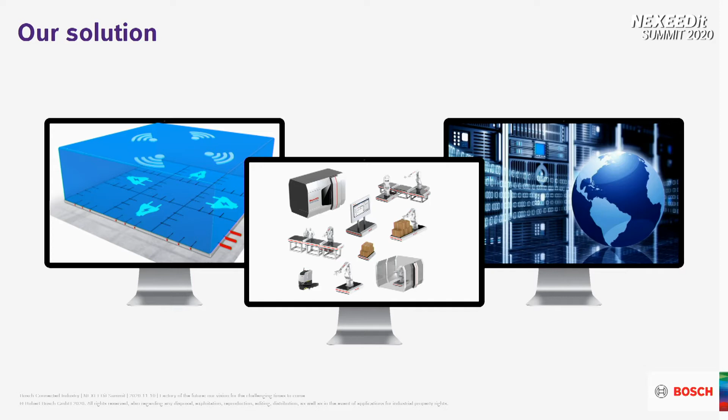What does it mean? We believe that in the future, customers will want to customize their products on their own on the internet. They will then set their order to the manufacturer. The manufacturer has to use the data from there continuously on, go into procurement, into pre-production, through the production process, through the quality supervision, but also in the dispatching, send the material away to the customers, and finally trace the product for its whole lifetime. If we are able to do that, we have a completely changed and digitalized manufacturing process, and that is what Nexeed is all about. Nexeed is about creating this manufacturing environment based upon the corresponding software solutions.

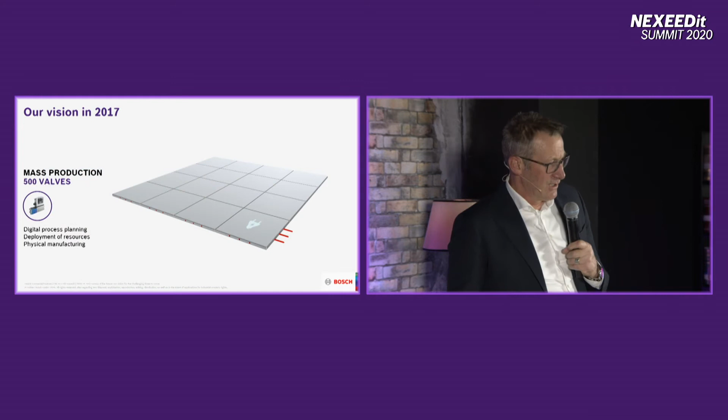How can it look like in the detail? Here we see a typical idea that we had in 2017. We would have a vision where you see the factory floor. The factory floor is charged inductively, so the operational material can move. We create an assembly line. We have open floor space.

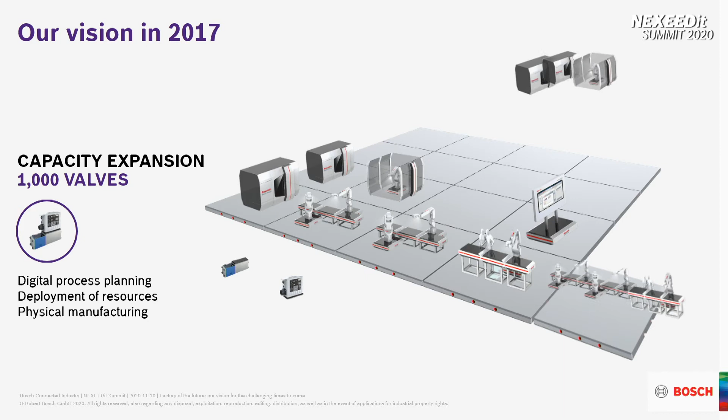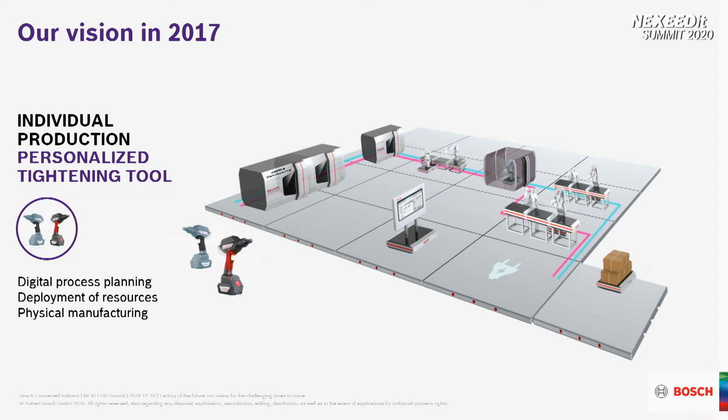Now we're doubling the volume. We double the assembly lines. We have more equipment in place. That is something that is still very, very known. What happens if we do another product? If we're going for another product, we take machinery out, we rearrange existing machinery, we bring new machinery in, we start a new automatic manufacturing process that is producing a different product from the product we've seen before.

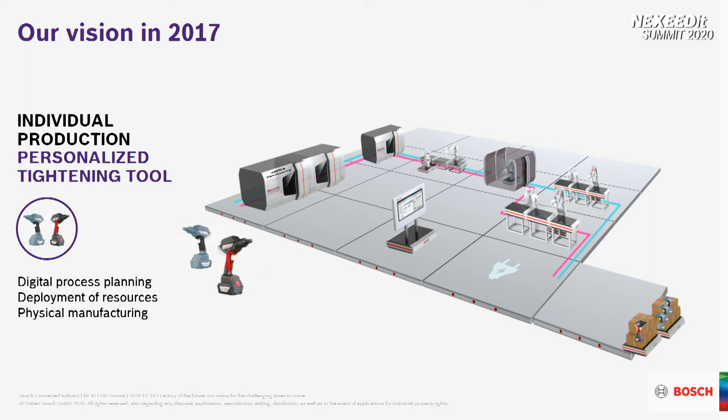That is the general idea of what we're trying to do with the factory of the future. We see it as a 10 to 15-year vision, but you can also see more and more elements of that coming into operation in our own product offerings. You also see more suppliers of the industry all over the world moving in this direction. So we believe it's no longer a vision only for 2017 and the next 10 years—it's moving on a worldwide basis.

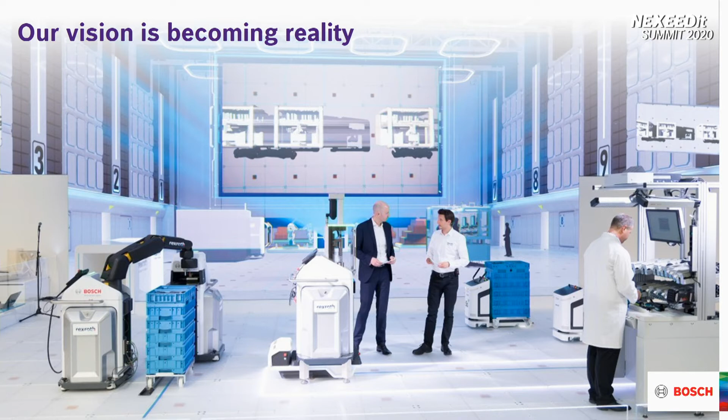So is it just vision? No, it's not. We have been trying to build this vision up, and we have presented it here. You see some pictures from the last Hannover Trade Fair that happened physically. In the foreground is equipment that we're manufacturing and selling already—cobots, AGVs meaning autonomous transport vehicles, movable press stations, camera-controlled assembly stations, all that stuff you see. All of this is products that can be bought today—they are available. In the background you see an animated digital display of the factory, so we can take it from there into further manufacturing steps, create even more value, and go for new applications. So we are really doing that, and let me be specific about it.

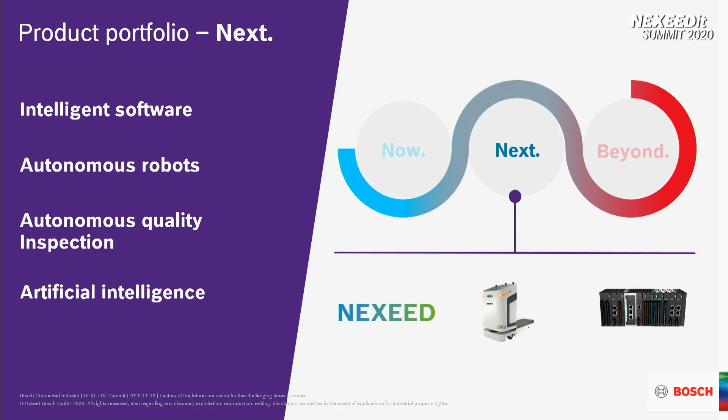The products we have we put into 3 product categories on a timeline. Number one is 'now'—what we can sell now. 'Next' is what's coming in the next 1 or 2 years, and 'beyond' is on a long time horizon of 5 to 10 years. When we talk about 'next,' we talk about intelligent software, autonomous robots, but also autonomous quality inspection by camera technology and the use of artificial intelligence. What does it look like?

Here we see what we do with the Nexeed solution. We are combining all the functionalities into one, which we also call—besides the product name Nexeed—a manufacturing backbone, to control manufacturing and logistics in the plant. That means we also want to ensure availability and maintenance of machines, but we can also quickly react to changes in the value streams, building up a different value stream as I've shown in the animation before. We will also add more functionalities and products, like for example a brand new automation system which we call ctrlX. The Nexeed functionality can be integrated into those devices, but it's also available as software only. Nexeed will be the brain of the factory of the future.

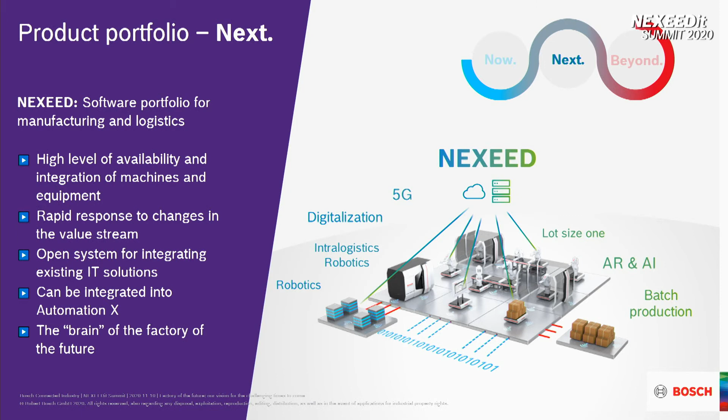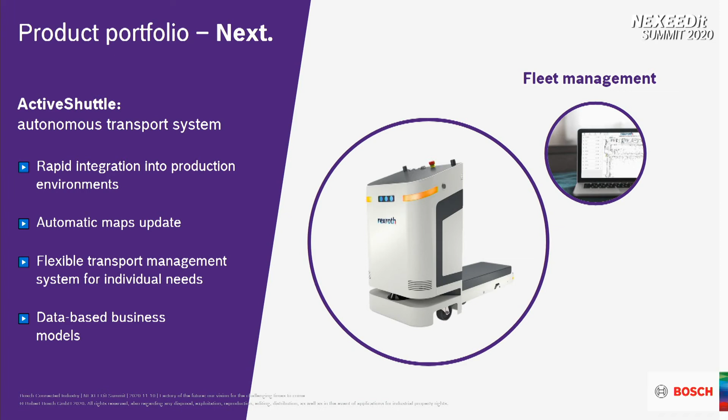But what we will also do is enable data-based business models on this basis. So we also have ctrlX AUTOMATION—this is a very modern, brand new control system for factory control. It's much more than just a PLC.

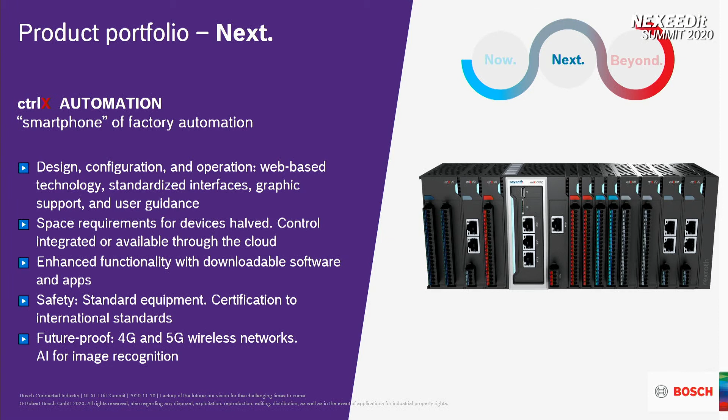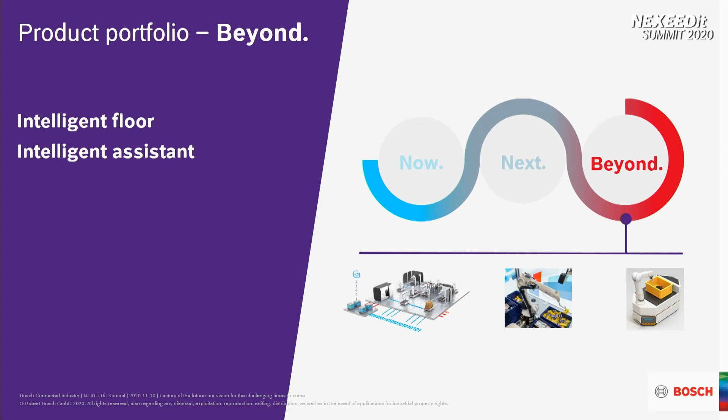The next one - and here we're clearly talking about the next generation on the long run - we're talking about the intelligent floor and intelligent assistant. What you can see here, based on what I've told you before, is the new factory ground, the new factory layer, let's call it that way. This ground floor can take up to 1.5 tons per square meter and can transfer 4 kilowatts of power.

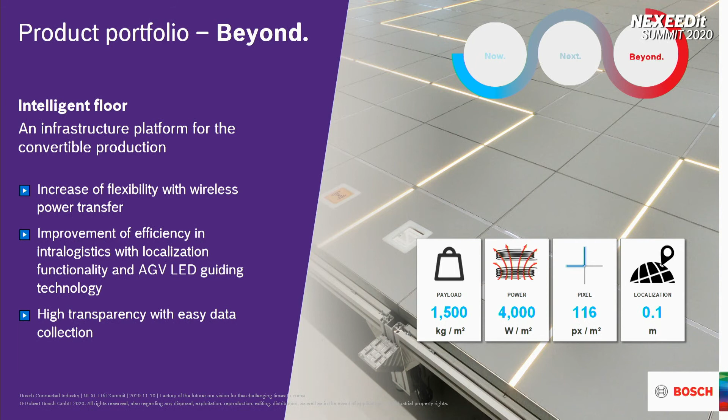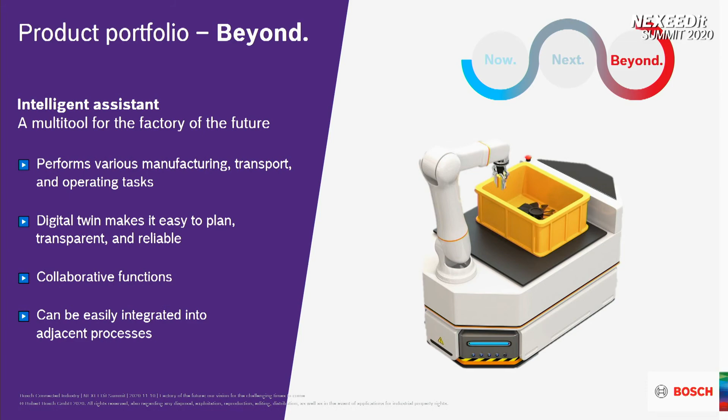It can also be used for precise localization tasks up to an accuracy of 0.1 meter. That will allow a lot of new functionality, particularly the wireless operation of new machinery. Here we have this product which we call the Intelligent Assistant. It's a combination of autonomously guided transport vehicles with new robot technology, and that will allow us not only to do autonomous robot work, but also to unload and load the trays or the assembly lines.

But what we can also do is provide tasks while we are in the transport phase. During transport, we can do sorting operations, quality checks, camera supervision, or other tasks used in this time in between that is usually not productive time.

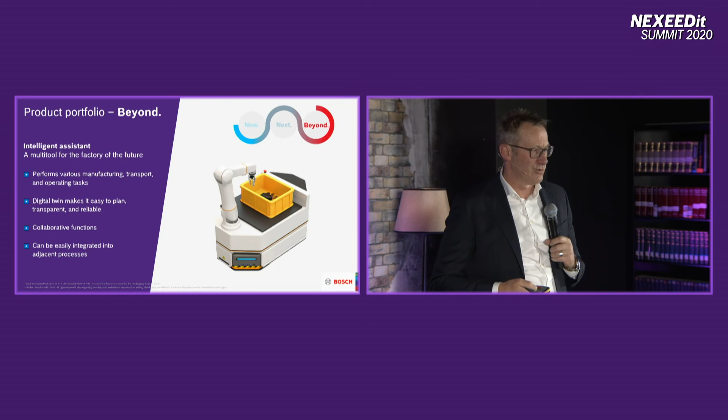Coming to the end - when you imagine this radical view of a factory explaining what could be done with a factory of the future, it will naturally provoke questions. What about the human people in the factory? What is the role of people in the factory of the future? The role of people in the factory of the future will continue to be a success factor, but the roles of the people will change.

Operators will no longer be solely in the current production process. There will be more and more automated tasks. But our associates will work more with collaborative robots that take monotonous and heavy work away. We will also see more coordination and process improvement tasks. That means human operation will be more about optimizing processes and coordinating improvements and introducing new tools, rather than the physical operation of a classical workload that exists within a plant.

This will also require a different skill set in IT, and specific training modules that we train in the Industry 4.0 Academy that we are running.

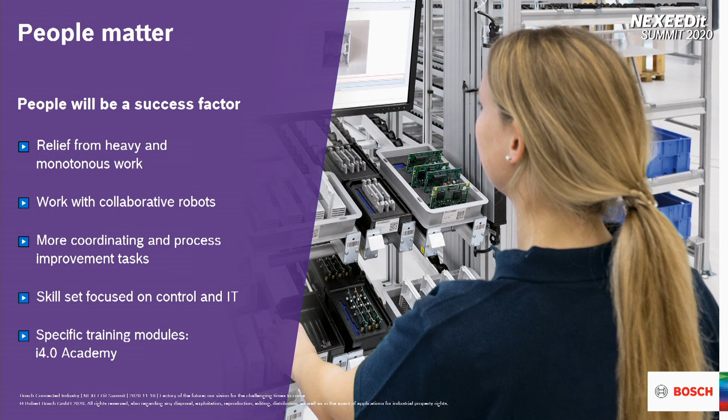Let me come to a summary and go back to the main messages. The factory of the future is fully flexible and adaptable. It will try to combine the big paradigms of mass production and individual product production, allowing small volume batch sizes or even lot size 1 under mass production circumstances in terms of cost and quality.

Core technologies will be autonomous and collaborative robots. It will be a 5G network. It will be new control technologies. And most important of all, it will be a customized factory control software that can organize the whole production of the future, as we are discussing it today here in the context of this event.

To make the factory of the future a reality, we are developing a complete portfolio alongside our vision. Within the next years, we will add step by step to complete the whole chain of products and solutions that we have been indicating in our animation.

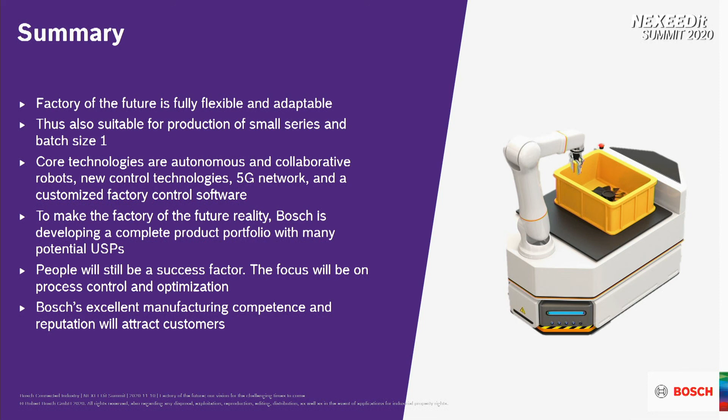People will continue to be a success factor, as I said before. They will be on the shop floor, but the profile of their jobs and duties will change. Last but not least, Bosch has an excellent reputation as a manufacturing company. We are operating close to 300 plants worldwide with very diverse products. We have the manufacturing know-how and the domain knowledge to make it happen and come with practical and usable solutions for the world of our customers.